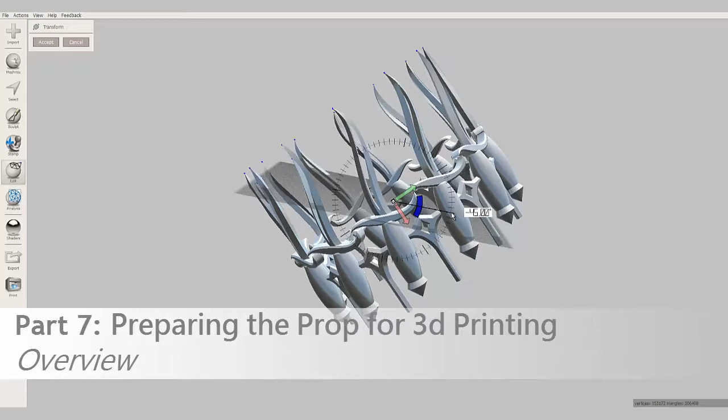In this section, we'll be using Meshmixer to align our crown to the ground plane. We'll then cut off a little bit at the bottom of our crown, so we have a flat starting point for our printer to start printing at. Then we'll use Meshmixer's overhang analysis tools to help create supports that will allow our crown to be printed. Let's see how that's done.

Now, Meshmixer's default navigation controls are different from 123D. However, we can change that by going up to View, Navigation Mode, and then selecting 123D. This will make it so when we right click, it'll rotate our camera, middle mouse button will zoom in and out, and if you hold it, it'll pan the camera, just like we've been using for 123D Design.

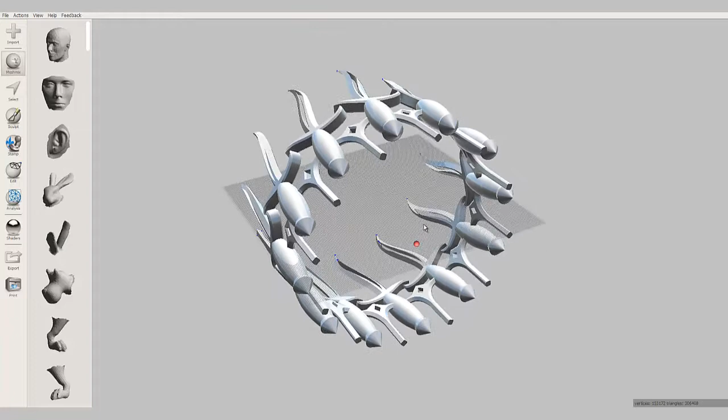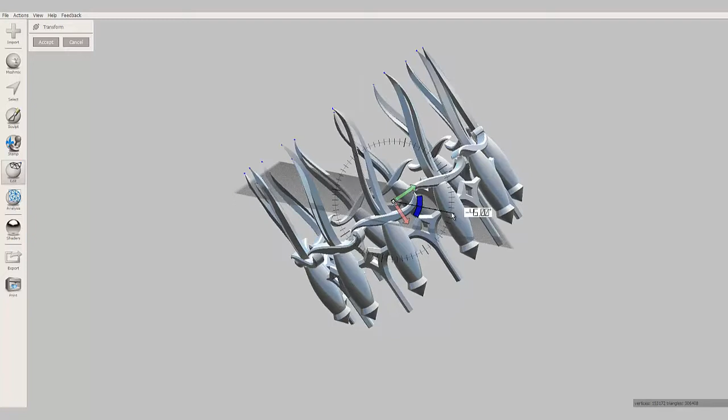Okay, our first step is to rotate our crown so it's on top of the ground plane. We're going to use the Transform tool under Edit. Once again, this tool looks similar to the one in 123D Design. We'll rotate it and then bring it up so it just about touches.

Then we're going to want to make sure that it's in the ground plane a little bit. This is so when we're printing, the printer actually starts printing on something flat. For instance, it would be very hard to print one of these daggers with the pointy bottom, because eventually the dagger would fall over. I'm going to accept the transform by clicking on Accept.

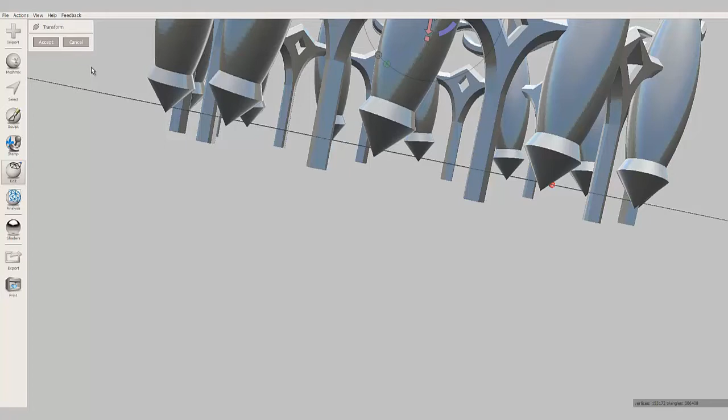Now the next step is to cut off this stuff that's protruding past the ground plane. To do this, we'll use the Plane Cut tool, also under Edit. We'll maneuver this plane, much like we did with our transform tool, to the ground level. Notice that this will cut off everything below a certain point.

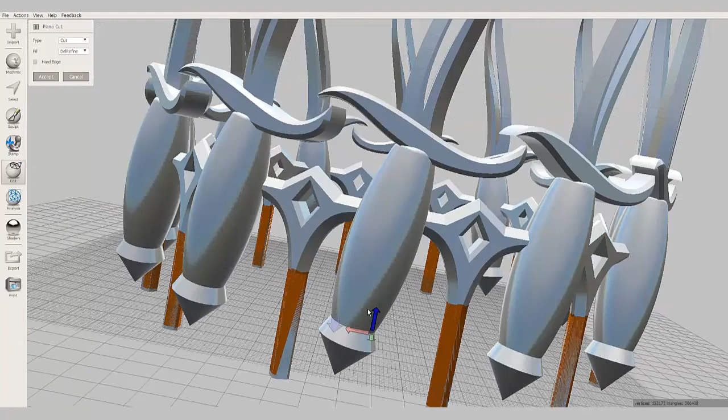Make sure to get your camera just right so you can see this. Once more, we basically want to put this plane in the ground plane, so it cuts off everything below the ground plane. That looks pretty excellent, so I'll go ahead and accept the cut.

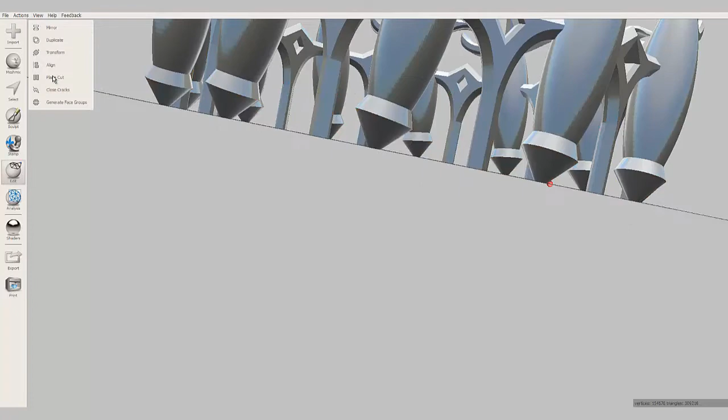Even with these flattened bottoms, most 3D printers still wouldn't be able to print this model because it's a particularly tricky print. However, using Meshmixer, we can create supports automatically. We'll go to Analysis, and then click on the Overhang tool.

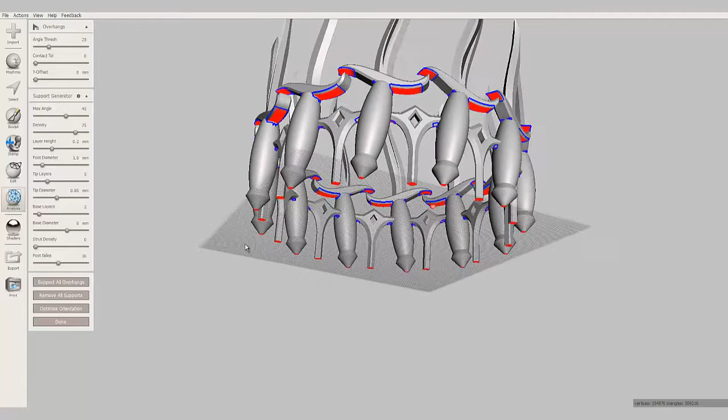Notice now all these red areas are places that the program thinks need supports, because they would essentially be trying to print in midair. I'm going to reset all my settings, and then I'll click on Support All Overhangs. This will automatically create some supports for us.

Now that Meshmixer has gone ahead and automatically created most of the supports that our model needs, we can add some supports of our own to places that the program didn't add them to. For example, these daggers are still just resting on the small flat spot on the pommel we created.

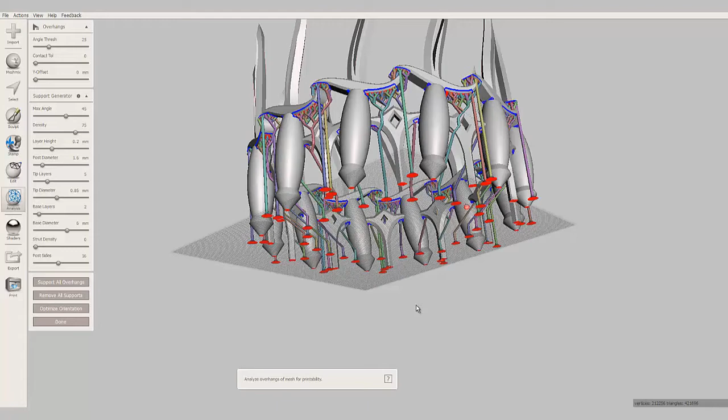Once the handle is printed, that would be half of the weight of the dagger on one small spot. Chances are, this piece would just tip over while being printed. We can thus add a couple of supports to the bottom of the pommel to help hold the dagger upright while printing. To do this, we simply maneuver the camera into position.

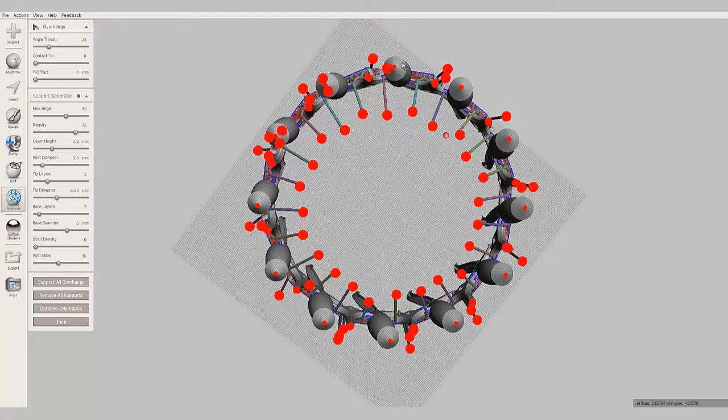I like looking directly at the bottom, and then we can just click on the model where we want to support. Because we have the overhang tool active, it'll automatically add an additional support where we click. I'll add a couple to the bottom of each dagger.

Mind you, these supports will eventually be removed from the crown once it's finished being printed. They come off just with a pair of pliers and a pair of scissors.

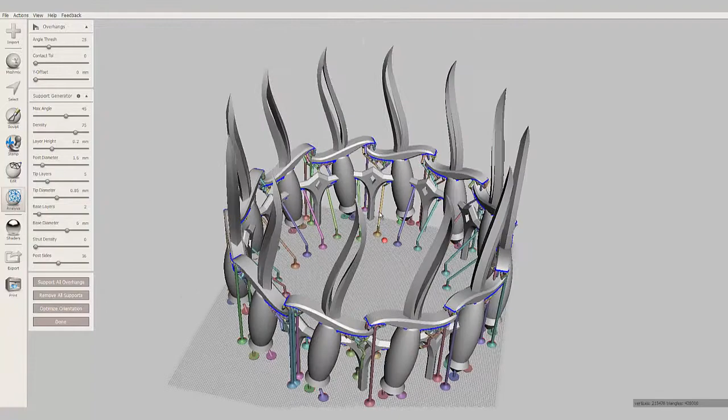Another place we might need more supports might be at the top of an existing support. For example, see these long little supports? Eventually they might bend under their own weight, or especially once it starts branching off into many other small supports. We can add another support right here just by clicking, and there we go. This will help prevent it from wobbling around and bending when printing.

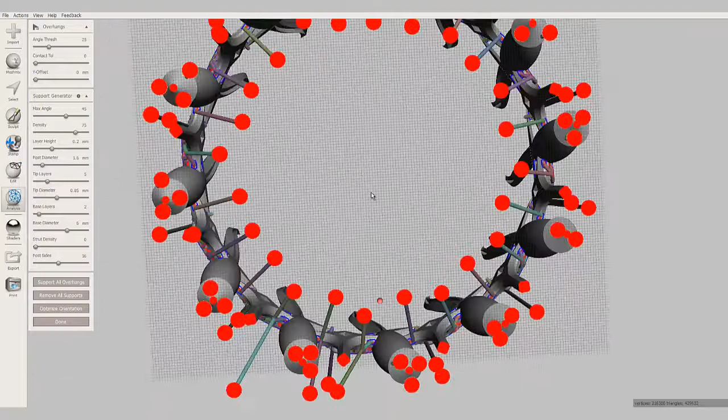I'll just go ahead and do this for all similar supports. If for some reason you ever need to remove a support you just added, you can hold Control and then click on the support, and Meshmixer will automatically delete that support from the model.

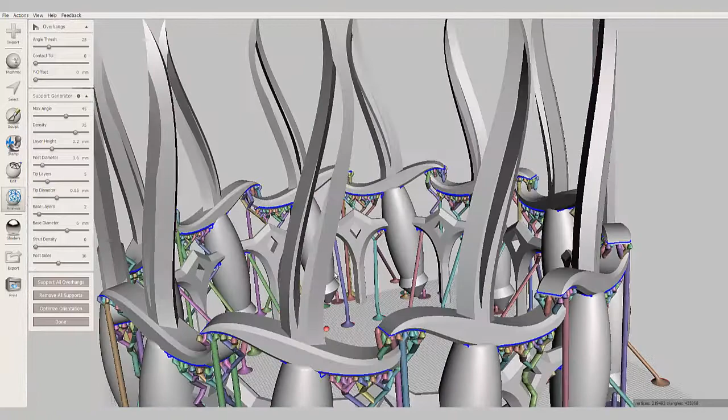You can also manually tell Meshmixer how to create a support by clicking and dragging. If you click on one spot and then drag to another, it'll automatically create a support between those two spots.

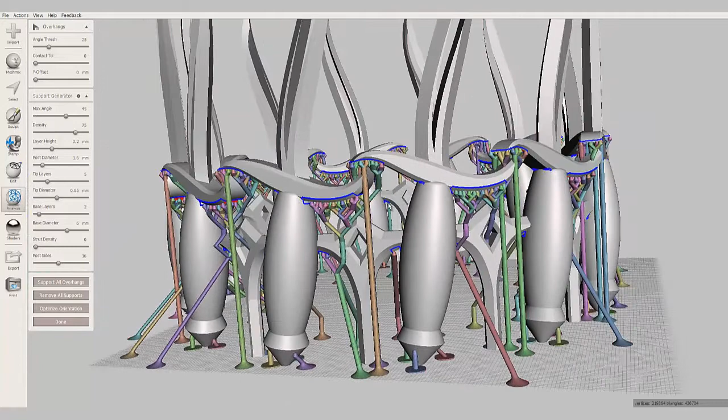Once you feel that your prop has enough supports to help it print, we can click the Done button to finish adding our supports. Then you'll want to go to File, Export, to export this model as an STL file. This file type can also be imported into just about any 3D printing program.

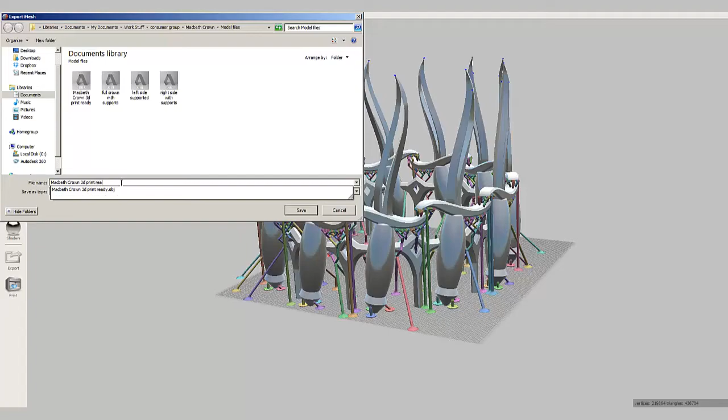I had to chop the crown in half using the plane cut tool in Meshmixer, and then I saved each half. By doing so, I can now fit the two halves onto one build plate. You might not have to do this if your build plate is large enough to fit your prop.

Once your prop is finished printing, all you have to do is remove the support material and then decorate your prop. Then you will have a custom, stage quality, meaningful prop.